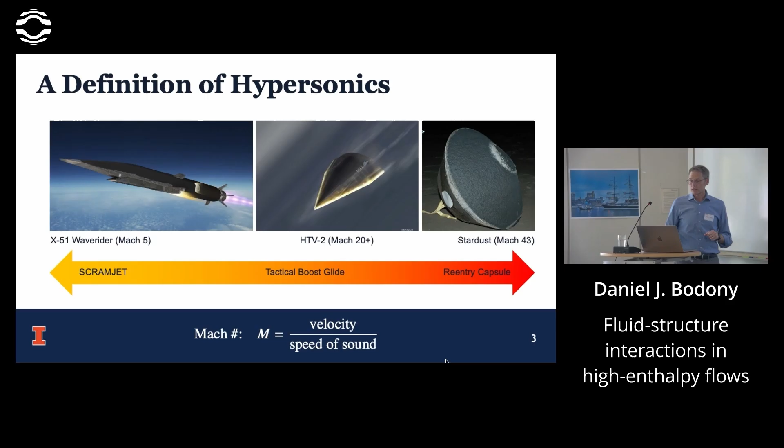For the types of things that I'm interested in, the vehicles that fly through the atmosphere at, say, Mach 10 or so, they experience a wide variety of physical phenomena that are of interest to me. And so I am first and foremost sort of an engineering scientist where I'm interested in the engineering application, but also the science that goes behind it. And we use large-scale computing to support that inquiry.

As you read throughout the figure, you'll notice there are many different types of physical processes. Some of these are very unrelated to each other at the outset. Modeling them can be quite difficult. I'll call out a couple. One of them is mechanical erosion and spallation. So as one of these vehicles flies through the atmosphere, it can encounter any number of particles, raindrops, dust particles, and when they hit the vehicle at very high speed, they can cause localized damage. In addition, as the material begins to heat up, it starts to chemically change. And sometimes that chemical change leads to fracturing of the surface at the local level.

And that leads to spallation of particles of the material surface into the flow. That is an extremely challenging and important area that I won't say too much about specifically. What has been driving us most recently are the

ablation and shape change, where the interaction of the flow with the material causes the material to recess as the material goes through a pyrolysis process, outgasses, which cools the surface, changes the surface shape, as well as standard fluid structure interaction, where you have unsteady forces and thermal loads on a surface, a metallic surface, for example, causes the surface to deform. That changes the aerodynamics.

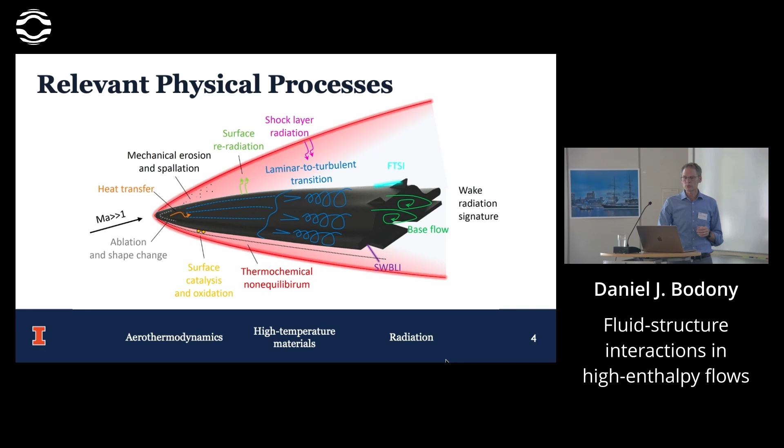So the first thing I want to do is normalize what kind of infrastructure we're going to use to run these simulations. And then I'll talk about the application of that infrastructure. And then I'll come back to the infrastructure at the end. Right, so in one slide, this is our standard non-radiating, non-chemically active infrastructure.

It is a traditional fluid structure interaction framework where I have the compressible reacting Navier-Stokes equations in a compartmentalized fluid solver. I have a thermo-mechanical solver that allows for nonlinear deformation, in-plane and out-of-plane stresses, full 3D finite element for the structure. These are all coupled together, and preCICE is the tool that we use to couple all these together.

Each solver has its own time step, space scale. All of them are parallelized. All of them are built to run on the largest computers that we have access to. I'll call out a couple of things.

For the fluid solver, we spend a lot of time focusing on turbulence and transition. So we pay close attention to the numerics that we use for handling shocks and turbulence simultaneously. So if you're interested about that, I'd be happy to describe it. But this is not finite volume style discretizations.

For our thermomechanical solvers here on the bottom, we've moved to an infrastructure called MFEM, developed by the Department of Energy's Lawrence Livermore National Lab. This is an open source framework that's very similar to deal.II and similar. We found it very profitable to use and have started to embrace it a little bit.

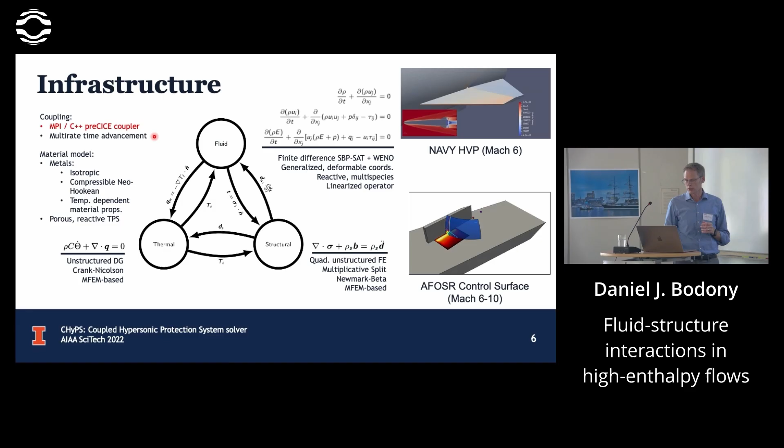When I say loosely coupled, this is what I mean. The temporal scales and spatial scales from either side of an interface are known to be different, and they can be dynamic. One of the things that we're exploring is event-driven coupling, where instead of having time steps between each solver, maybe one side runs for a long time until there's an event.

And then you call a solver on the other side, and you have some exchange of data at that event. That spallation example that I gave at the beginning is sort of a hint of where that might be useful. But this is what I mean when I say loosely coupled.

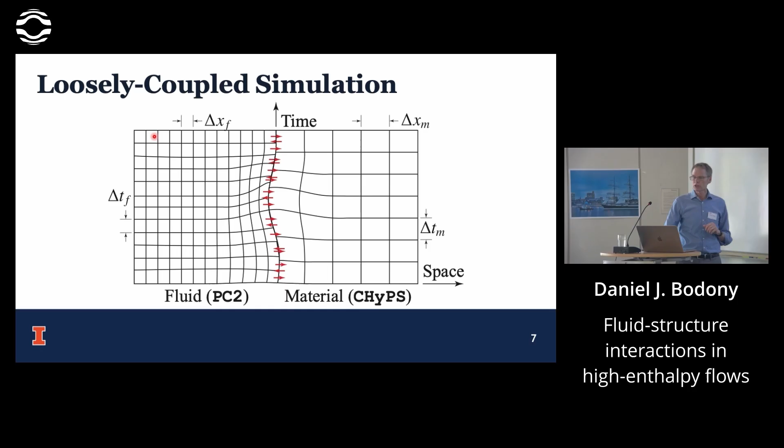And a little bit more detail on the fluid solver infrastructure, because it was built from the beginning to be multi-physics. So the fluid solver itself can handle multiple grids. Each grid can have its own separate physical description of a problem. Don't have to solve the same equations in all the grids.

And one thing that I will also highlight is that we spend a lot of time doing multi-physics linear analysis, meaning what is the linear operator that describes the linearized behavior of the entire system. And we found preCICE to be very, very profitable in extracting that linearized operator for some analysis, and I'll highlight that a little bit.

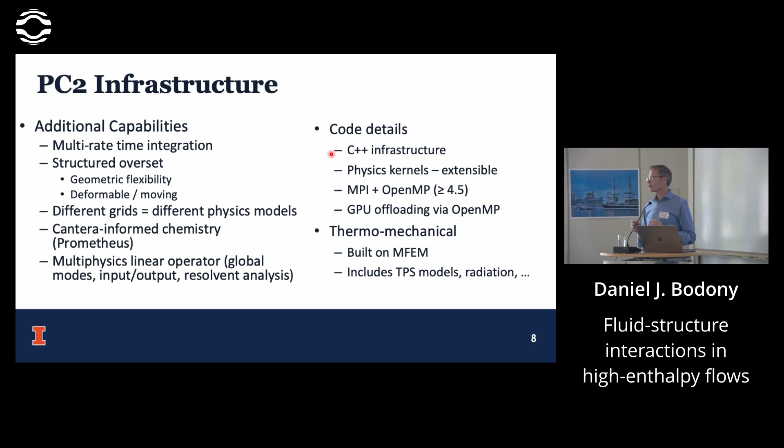Our codes are all built on standard MPI and OpenMP, but they also use backends like Kokkos for hardware acceleration on different architectures. And when I say we run at scale, this is an example of one of the scaling runs that we've done with the fluid solver.

So PC2 is one name for our flow solver. Speed up is on the vertical axis in a strong scaling sense. Horizontal axis is nodes. So each of these nodes has 50 plus CPU cores. And Frontera is the largest machine in the United States for education-focused supercomputing. The machine has 8,000 nodes. So we can run on the entire Frontera machine, 500,000 cores with this infrastructure.

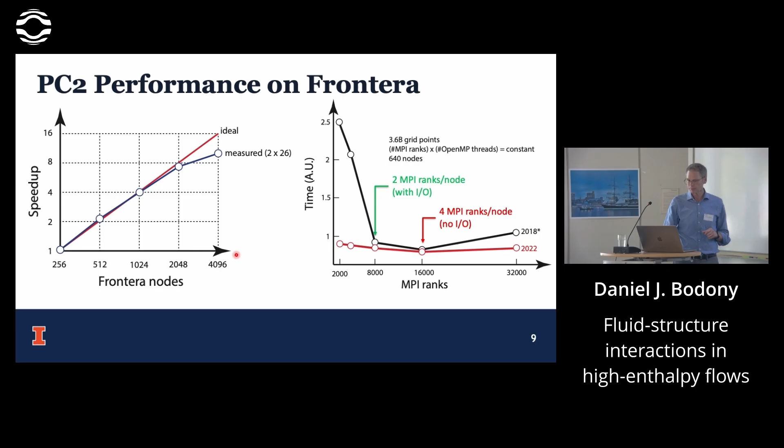All right, so that's the infrastructure from a high-level sense. I'm now going to go into a couple applications of this infrastructure. And the first one I'm going to start off with is a traditional fluid structure interaction problem of interest to the United States Air Force. This is funded by the Air Force Office of Scientific Research.

And the idea is you have a supersonic or hypersonic flow coming from right to left. It intersects this flat plate that has a nominally flat surface. And on this flat plate is a vertical fin that is angled several degrees from the incoming flow. And there's a shock wave boundary layer interaction scenario that is set up.

The geometry of this problem is described by conical symmetry. So think spheres of origin sitting on this VCO, which stands for virtual conical origin. And if I take spherical shells of constant radius about that point, I get roughly conical symmetry in those planes, and we can document those coordinates with those two labels there.

And so if I look in that spherical plane and I look at the flow that happens in that plane due to the shock boundary layer interaction, this is what we see. So looking at this little inset image, moving to the right, vertical is the phi, horizontal is the theta. There's a main shock wave that is created by the fin, but that shock wave generates a pressure gradient that separates the boundary layer. That boundary layer is roughly conically symmetric. And it creates this interaction region at the base of that shock boundary layer interaction.

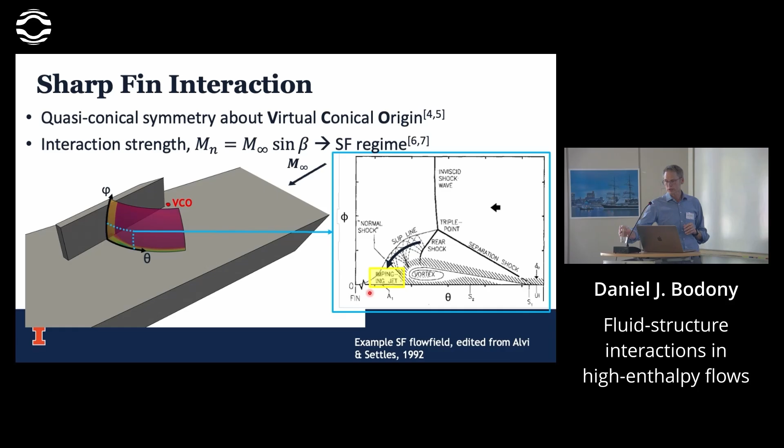And one of the artifacts of that interaction region is an impinging jet. So through this interaction, there's actually a supersonic flow that gets directed directly to the surface of the plate because of this shock boundary layer interaction. It would not be there if the flow was purely inviscid. And this impinging jet is known to lead to very high localized pressure and thermal loads on the surface, and is what our main focus of investigation was.

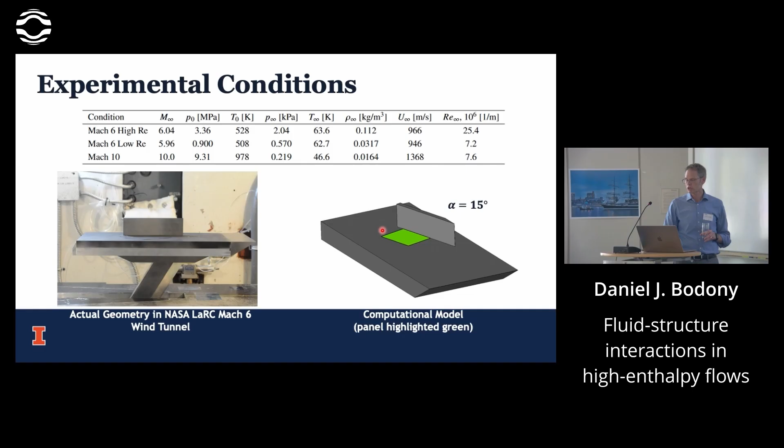You'll notice that the transverse thermal gradients are quite strong. Turns out that the transverse displacement of thermal expansion is just as large as the in-plane or out-of-plane displacement from the pressure non-uniformity. And as the simulation evolves over a 6-second physical time window, the temperature of the panel increases by approximately 100 Kelvin. So these are pretty substantial temperature rises over the time period.

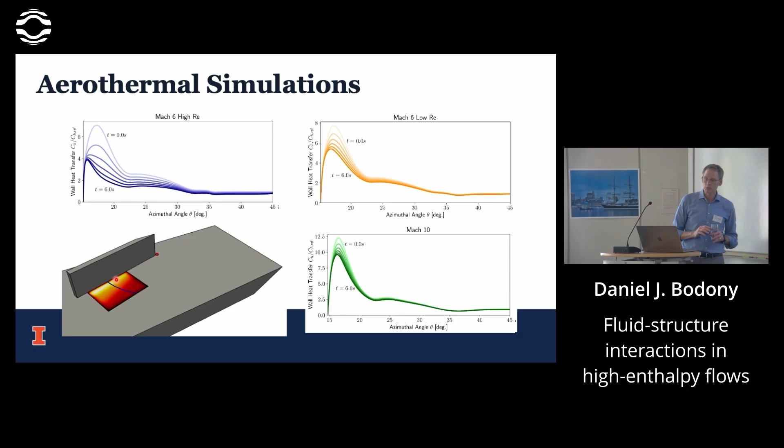One thing I'll note is that these calculations were performed with SU2, the RANS code. And some things that are missing is that there are actually very thin vortices that streak from the upstream side to the downstream side that add additional heat transfer locality to the surface of the panel that are missed by a RANS model. I have those results in another slide if there's interest.

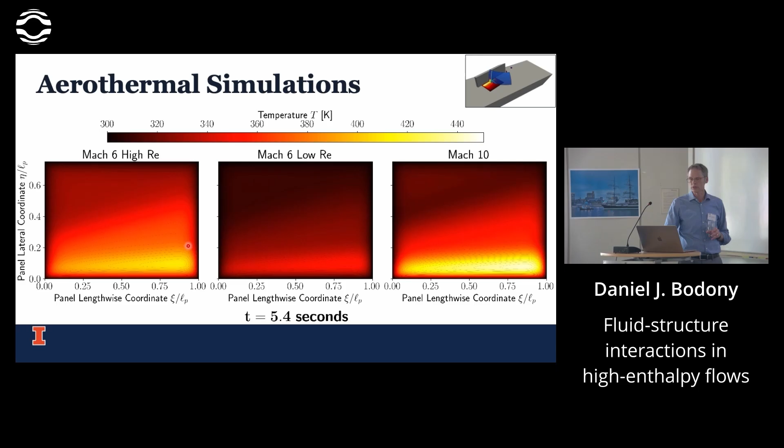All right. So that was a standard fluid structure interaction problem at high enthalpy, where high enthalpy meant high Mach number, not so much chemistry. What I'm now going to do is transition to a much higher enthalpy case focused on a facility called the Plasmatron-X, which is an inductively coupled plasma facility. There's a similar one in VKI. And focus on ablation. And really, it's about studying material response at very high enthalpies. And so this application is going to drive our multiphysics coupling in additional directions to support the very high enthalpy conditions.

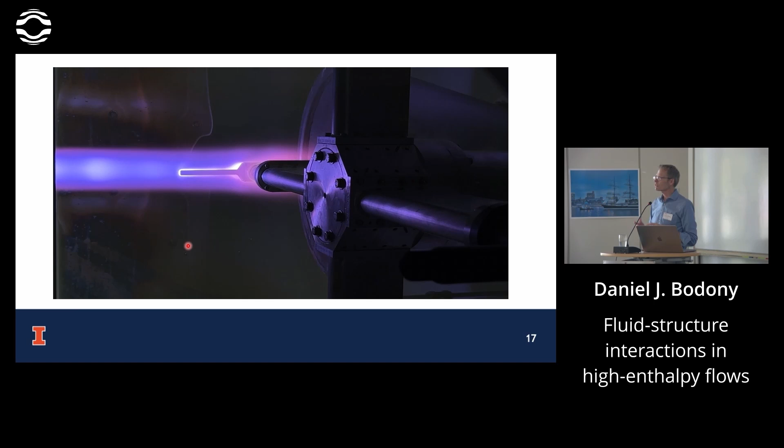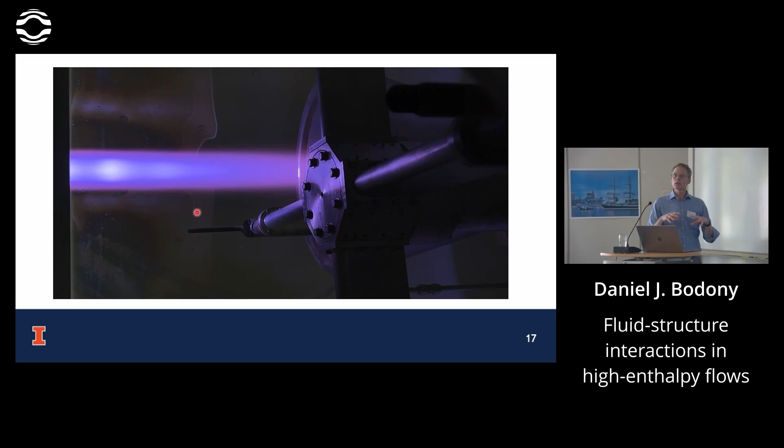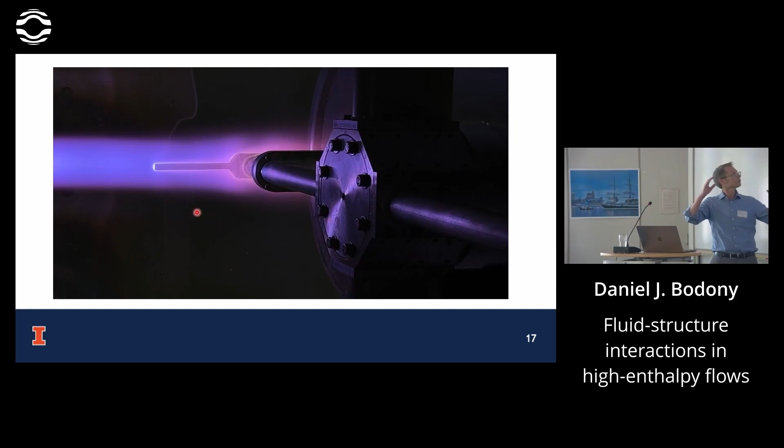During testing, these mechanical arms are rotated into the flow. And at the end of one of these mechanical arms, you see a sample. You can clearly see the radiation from the sample, and then they're tracking the heat flux at the leading edge of that sample through some data processing that happens later. Our goal is to understand the flow physics of the facility itself, as well as to understand the response of a material sample placed in that flow. And for scale, the sample is about that far from the torch exit. So this is about full scale.

So here's what the Plasmatron-X is. It's an inductively coupled plasma. It is a very simple device in that there is a cylindrical tube through which multiple ports are created for injecting gases of various types: air, argon, nitrogen, oxygen, carbon dioxide, for example. The torch has swirl added to it for flow stability. But most importantly, wrapped around the torch is a coil through which radio frequency electromagnetic waves are passed, and those joule heat the gas inside the torch. The coils operate at 350 kilowatts as their maximum power. Approximately half of that power gets dumped into the fluid.

The interaction region occurs directly underneath the coils. Notice that the coils are helical, so they actually impart an asymmetry to the torch flow as it comes out. That turns out to be important later. And then the flow accelerates as it goes to the exit. This nozzle has a converging diverging geometry shown. Most of the work is done with a straight nozzle only, which is what I'll also show. Once that flow leaves the torch exit, it intersects with the body. And you'll notice that the flow around the body is quite unsteady.

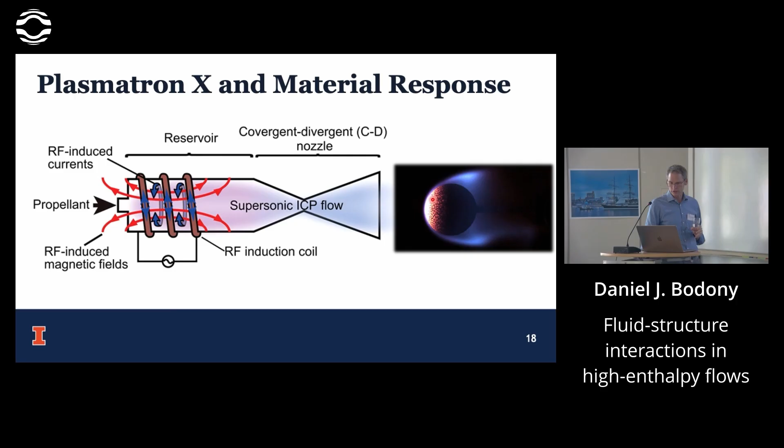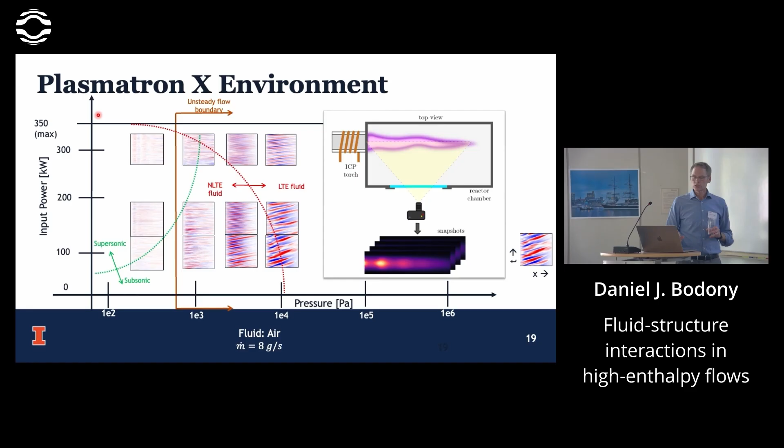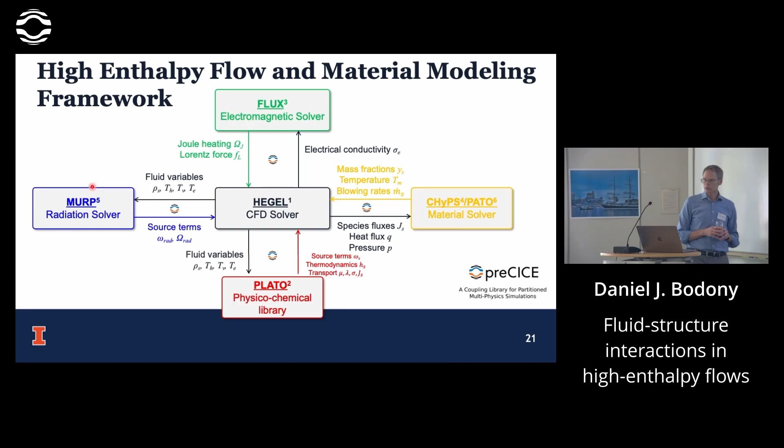All of these are connected and run simultaneously through preCICE. And the data that we pass back and forth is, in this case, actually quite substantial. There's several variables that we have to pass through, all through volumetric coupling to make this work. And I'll leave this up there for a second. I'll say that we've spent a lot of time understanding what needs to be passed, the order in which the data needs to be passed, and what data should be passed in which direction for numerical stability, provable convergence, as well as physical modeling accuracy. We continually evolve this infrastructure as we work harder problems, but this has shown to be relatively robust, I will say.

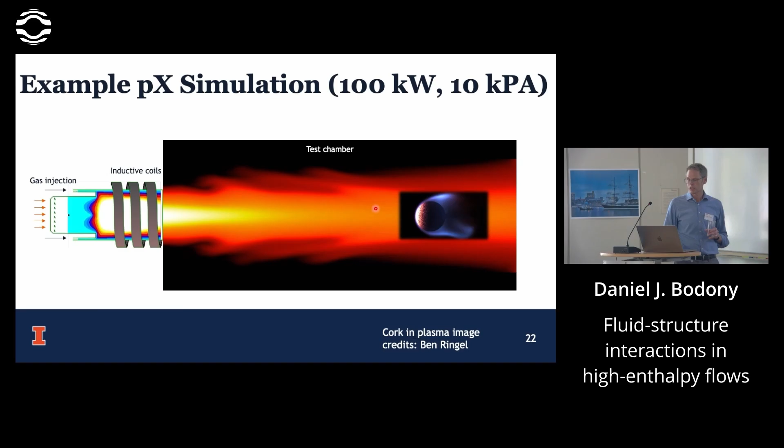And if you follow one of these black regions long enough, you can imagine that this black region, which is cool fluid, hits the sample, locally cooling the sample, changing the overall average temperature that the sample sees and changing the overall average heat flux that the sample experiences. And this is believed to be one of the reasons why the correlations of heat flux and temperature in the plasmatron were not matching other expectations based on steady flow assumption.

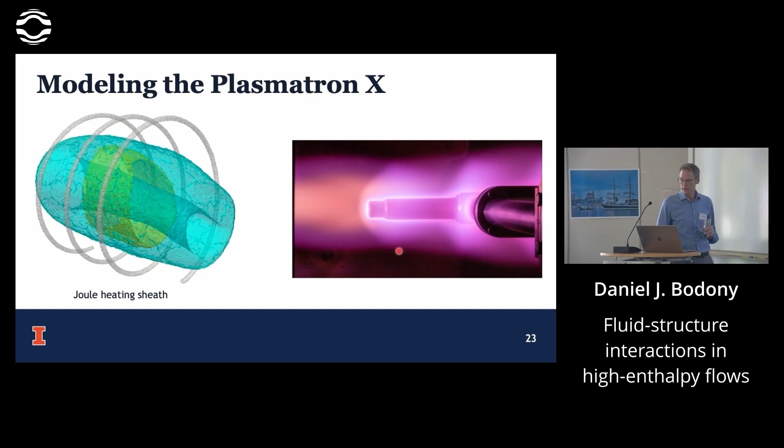Also on the right, you'll see a case where the supersonic jet was underexpanded, and you can see the shock cells that have been set up in that high temperature plasma condition. Those just document that.

One of the challenges that we have and what continues to drive us to perform these simulations is that experimental diagnostics are limited. We really have few measurements on which we can lock our predictions to reality. One of the primary ones is radiation. So there's always a series of cameras that are used to observe the jet and the sample. And there are many ways in which you can extract information from those measurements. One of them is just basic intensity of the radiation as a function of distance.

And you'll see that we get fair agreement. We do not have perfect agreement. And we don't yet understand why we don't have perfect agreement. Other investigators at other facilities see similar comparisons. And there's a lot of uncertainty in the literature trying to model these plasmatron facilities from the basic engineering input parameters of power and pressure into actual predictions

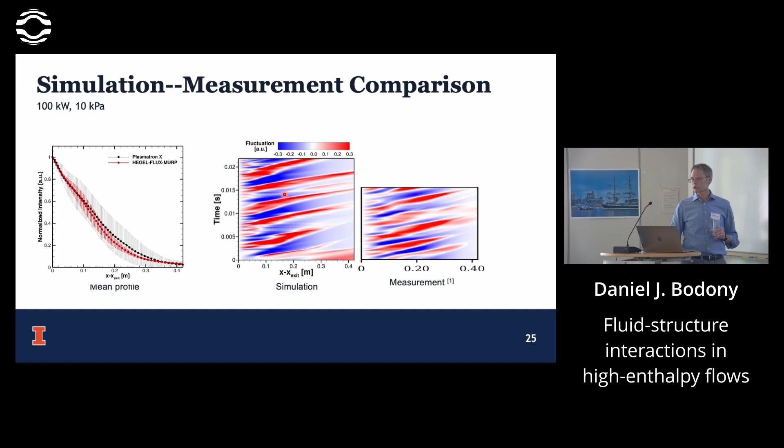There's rough agreement between them, so we get the basic convective velocity, but the physical origin of these modes is, we think we know what it is, and we're dotting up that argument to make sure that we can conclusively say so. But you'll notice that there is some spatial structure differences between the two images, right? For example, the interfaces on the simulation between red and blue are sharper than those in the experiment. Is that a consequence of the measurement? Is that a modeling deficiency? That part we don't yet know.

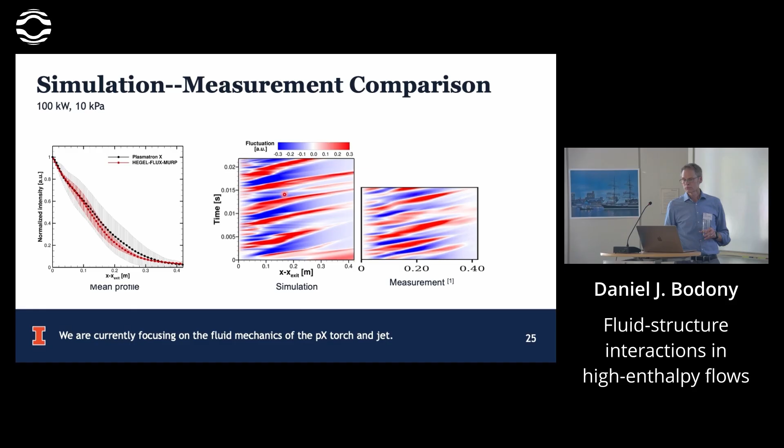Now, of course, the whole purpose of this thing is to put a sample in the facility.

Excuse me, I got a tickle.

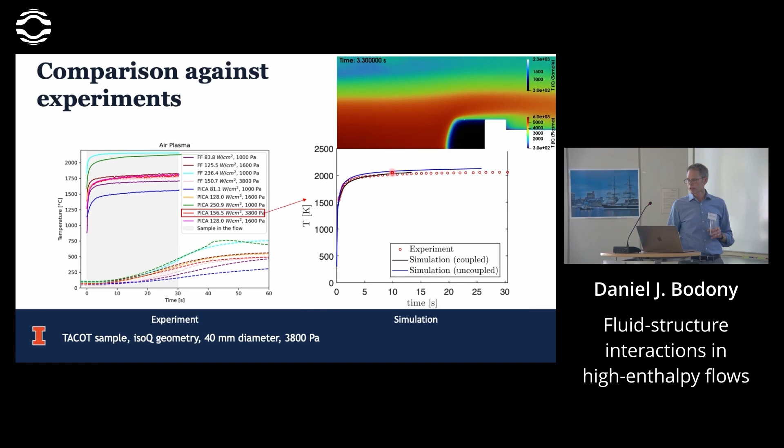And if you watch this movie, whoops, play it again, there. Over the space of several seconds, say 10 seconds, the sample has moved approximately 2 to 3 millimeters, on the scale of 180 millimeters from the torch exit. We're able to predict the temperature through various probes placed within the sample to a reasonable degree of accuracy. There is some sensitivity of the materials that we use, so the direct comparisons are difficult quantitatively. And I think I'll skip this for the sake of time.

And it turns out that there's a phenomenon called differential ablation, or it has other names, but differential ablation is the big one, where if you put an ablative material in a flow, it will form grooves. These grooves have a structure. They look like waves if you go to the beach, the sand gets waves in it if it has a river coming over it, or from the waves from the ocean. That deformation of the sand is very similar to the creation of these grooves, but the physical origin of these grooves is unknown.

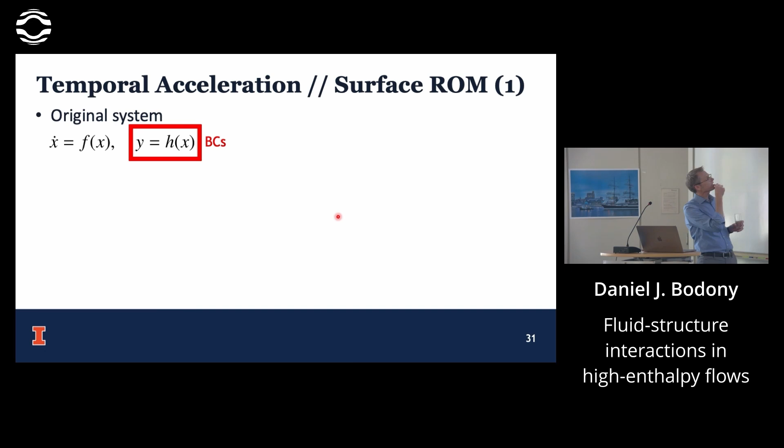So imagine running your coupled simulation and you've got a flow solver on one side, a structural solver on the other, or some other material response solver. And on the interface, you treat it as a dynamical system whose dynamics are coupled to the two but are independent of either. Can you come up with a faster acceleration technique for integrating that surface? And so the idea is you take your original dynamical system, you identify the boundary conditions that are the precise coupling conditions, and then you say, okay, can I take those data and project them onto a reduced rank model? So this is like having a dynamical system on the interface itself, whose dynamics are driven by recovering from the data of the primary simulation some operator inference.

And so the technique that we use is based on oblique projections, where these operators phi and psi correspond to encoding and decoding, if that's the language you like to use. And from these operators, we can come up with a lower rank system Z, where Z is a much smaller number of variables. Think like 10 or 20 degrees of freedom compared to thousands. A and H are operators that are learned as part of the simulation. And we optimize these operators during the calculation.

So imagine a scenario where you do a time-resolved calculation for a period of time. You learn these operators A and H, phi and psi. You run with the learned operators for a period. Then you relearn the operators as the simulation proceeds. And that learning and adjusting the operators leads to a measurable acceleration of the coupled simulation. And what I can show is that the techniques that we use are superior in terms of error, which is less important than that we can recover 1/10 to 1/100th of the cost by this adaptive learning process.

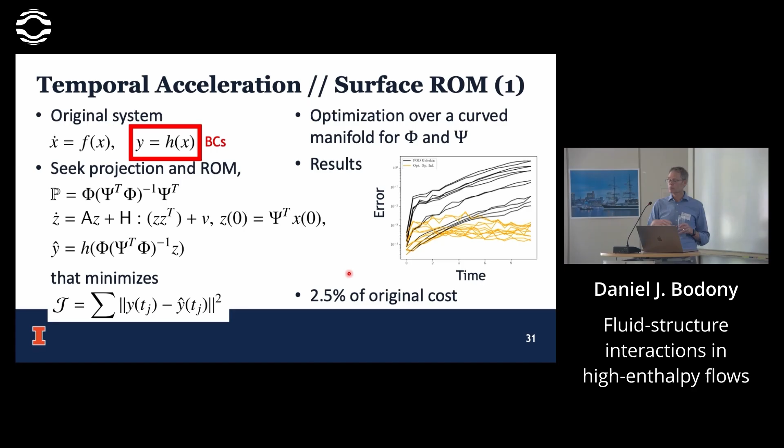Another feature we've been using is to take the linearized operator, right? So we're used to running codes that are full nonlinear codes. Some of the tools that you have may be able to produce linearized versions of them through automatic differentiation or whatever. But what if we knew these linearized operators early on? Then a little bit of linear algebra shows that you can use concepts like the resolvent and the input-output operator, which have structure that is directly relevant to what happens on the interface itself.

All right, so now I'm coming very close to the end, and I wanted to give a couple of specific comments on preCICE. The first one is really thank you. I have written codes that do what preCICE has done for the last 20 years. It's miserable. Thank you. preCICE is really the first tool that I've been able to use robustly. When this tickle stops, I'll be very happy. Because it no longer requires me to think about the code coupling. I can just say use preCICE and couple, and it's done. And I know that that happens not by accident. So I do want to say thank you for that.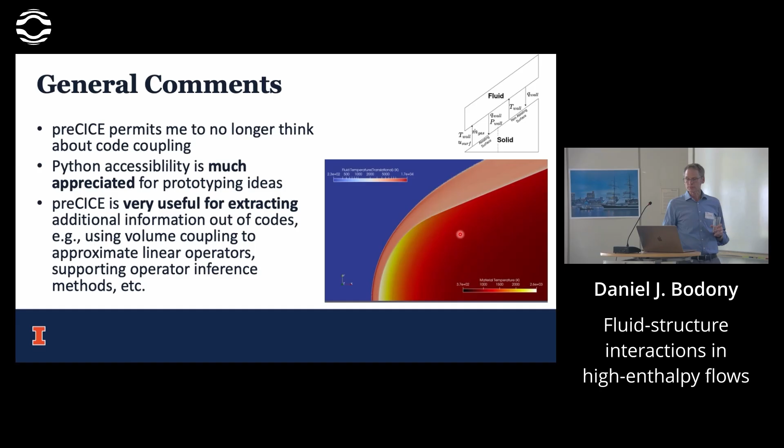We do contribute, and so we've used SU2 quite a bit. We've updated some of the preCICE couplers that go with SU2. And I just got a request from our host here, because we use MFEM quite a bit, to create some MFEM-developed tutorials and coupling interfaces. And so we're very grateful to contribute back to the community from which we have benefited.

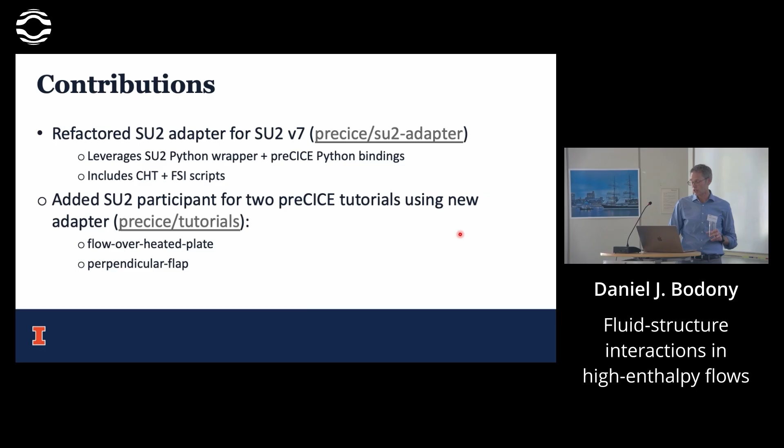So to close, I hope I've convinced you that we're studying several forms of this fluid structure interaction at high enthalpy conditions. We have other problems that I haven't described here. Doing so requires this very tight interaction between experiment and simulation and modeling these complex multiphysics simulation tools, of which preCICE is a core component.

I didn't even go into a lot of the details, like what are the models for the non-equilibrium, material degradation models, surface catalysis, et cetera, which are some of the leading modeling questions that are being answered by this infrastructure. And with that, I'll close and thank you for your time and happy to answer all your questions.

Thank you, Dan. Very interesting and very nice points. Who has the first question?

So I don't remember exactly which variables were involved in the entire coupling, but especially for the free stream simulations, are there discontinuities carried along in your coupling data, or is this typically something you get away with? So I believe the question is, do we have discontinuities that propagate through the coupling interfaces? Yes. We are generally scale resolving, so there are no discontinuities that come in. Shocks are the closest thing, but they get modulated by the boundary layer. So there are no shocks that hit the surface through the coupling interface. Okay. That is a great question, and we can talk about that separately if you want to continue. Thanks.

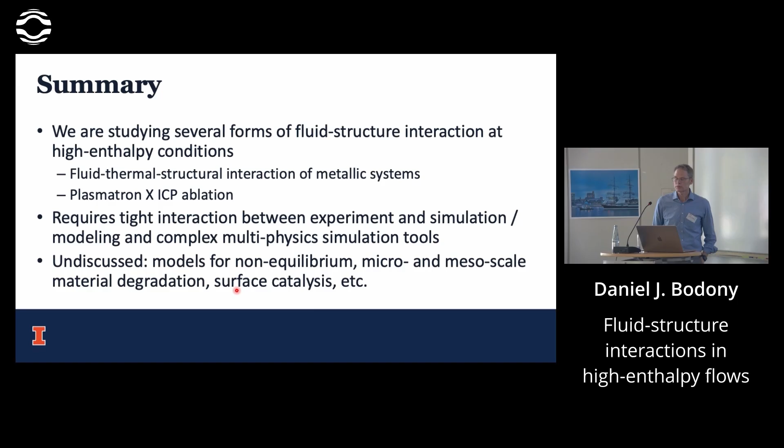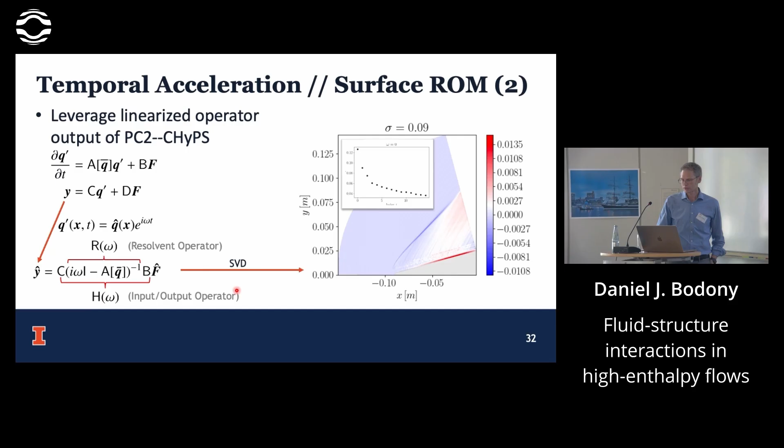Here, I'll just go back. Oh, I need a nice image. This is good enough. Oh, come on. Where's the boundary layer? There.

This is good enough. So imagine that I want to model what happens at the interface. And let me give a couple scenarios to motivate it, then I'll answer your question directly. Right, so imagine that I want to do a long time calculation of the material, which is ablative material, and CHyPS is the name of our solver for it. Imagine I want to model this boundary layer that forms.

But I don't want to carry along the flow solver because that carries a lot of cost and a lot of timescale disparities. So from the side of CHyPS, can I learn what the exterior flow is trying to do on the surface? Well, I can if I permit myself the following scenario. Imagine I'm going to run the flow solver and the CHyPS solver simultaneously for a little while in time.

And I use perturbations that I design to extract some fundamental behavior. Think of it like extracting the Green's function for that interaction. I use preCICE to couple the two codes. I extract the data on the interface. Now I have this time-dependent interfacial data that connects the current state of the material to what the flow is doing on the exterior.

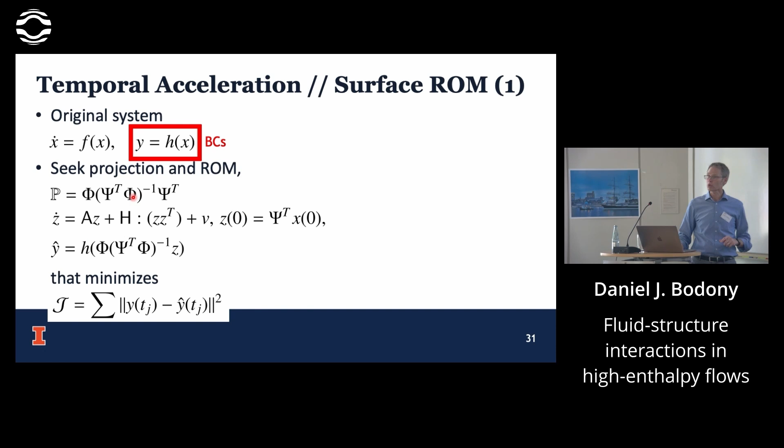Oblique projection is superior in that the encoder and the decoder are no longer required to be orthogonal to each other. All that to say, I can come up with small operators A and H that represent the fluid action on the material when the solver is gone. Now I can take this surface ROM and replace the flow solver with it. Now I can run the material response solver with a model for the exterior without having to actually run the exterior fluid model. That is one idea we have pursued.

And I know that as the material evolves, those operators A and H have to evolve also. So I allow for there to be some streaming learning where I constantly evaluate A and H. And you can build a schedule for that learning, that adaptive learning, and then it just runs automatically. So imagine you run a calculation. It starts by having all the solvers run simultaneously.

It does the learning that it needs, develops the model, stops running the most expensive solver, runs with the reduced solver for a period of time, checks its local error as it goes along. There are ways to do that. And then relearns those operators, continues on. And you can do a fire and forget kind of model for that. So we have done that for these fluids. So you're learning a dynamic Dirichlet-to-Neumann map for the fluid. For one side. We chose the fluid because it's the more expensive side.

But you can do this for any time you have two time-dependent solvers running simultaneously. Thank you. Sorry, can I just follow up? So you said you have a good estimate. You have an estimate for the error, or you know the error in your reduced order? We have an estimate. Okay.

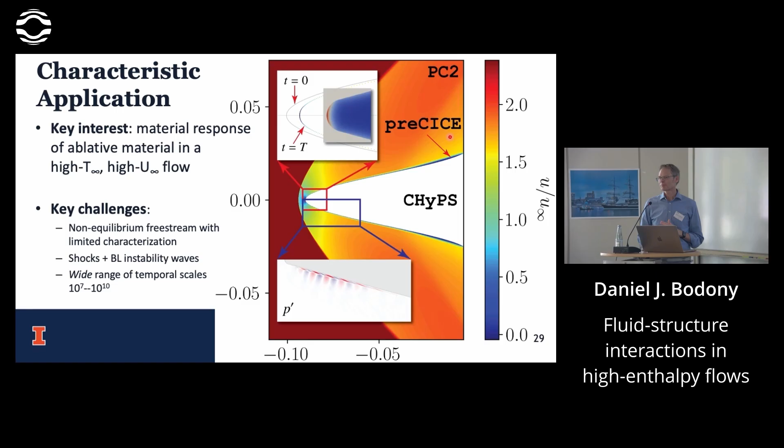The long answer is I prefer to use the physics that I have at my disposal first. And when I can't use those, then I'll go to something where I don't understand what happens underneath the hood. That's my opinion. Your mileage may vary. If you haven't sensed it yet, I'm a big fan of linearized analysis, because it turns out if you do this right, it's really good.

Now, obviously, it doesn't handle things like shocks, but you can learn an awful lot from this before you jump to a neural network. Or this can be what you constrain your neural network by. That is even more powerful.

Okay, let me ask something. This use case that you described where you use preCICE for analysis, just to translate this a bit into preCICE language. So this means that technically you do a volume coupling, right? So you have SU2 on the one side, and then you have a short Python script on the other side. And in the Python script, you write something to preCICE, which you then read in SU2 to modify your velocity values. In essence, yeah.

So we do both surface and volumetric perturbations, depending on what we need. But for your volumetric example, just take a flow solver. If I do volumetric coupling, then if I perturb the state at one point, and I apply the right-hand side operator of the fluid solver, I'll get a new vector on the output. That is the action of the linearized operator on that perturbed vector. If I do a little bit of math, I can convert that directly back into the linearized operator itself.